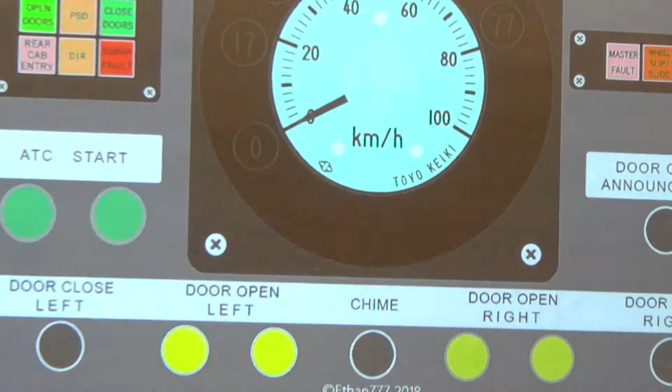Now you can continue, I will start the scenario. So now you are the train driver. What should you do first?

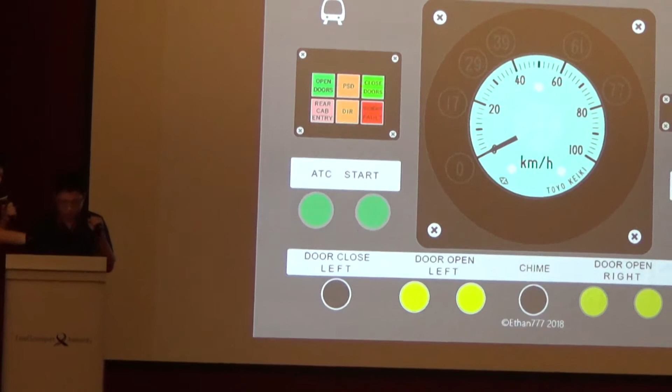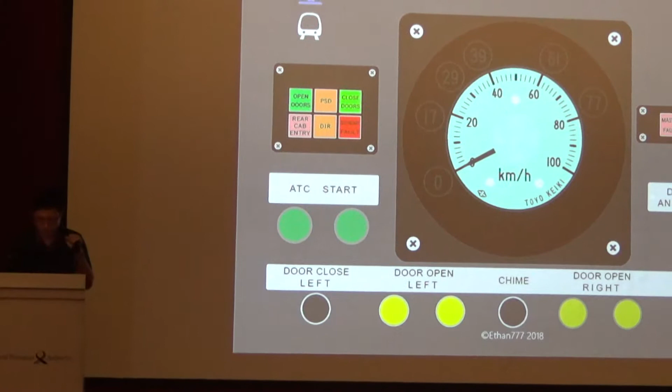Doors open, yeah, the doors are open now, right? So you follow all the indications. What's the first thing that you do? Door closed? No, before you close the door. Announcement. Doors are closing. Correct.

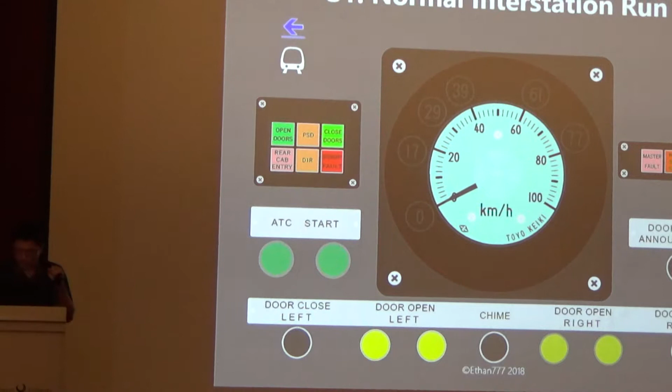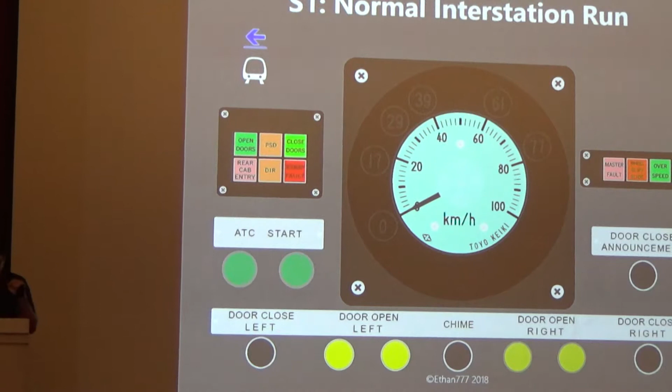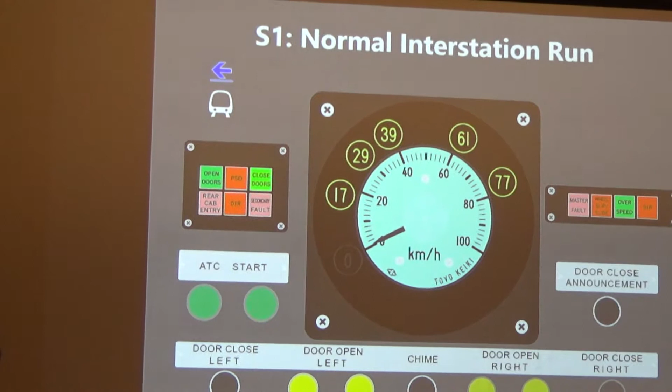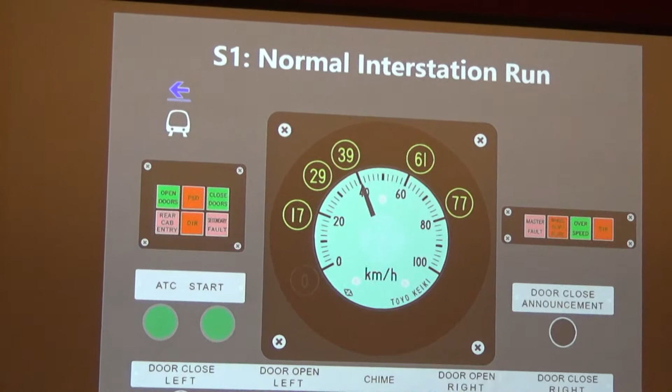So this is precisely my application. Like in reality, as of this point, you actually don't need to do anything because the train is driving on its own. So it is meant to emulate the signaling behavior on the North South East West line, Westinghouse. So the reason why I chose...

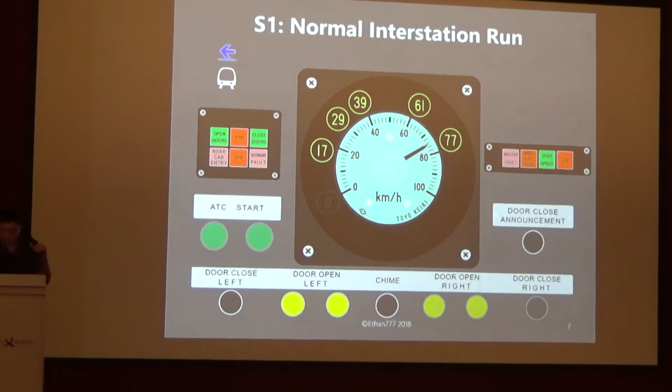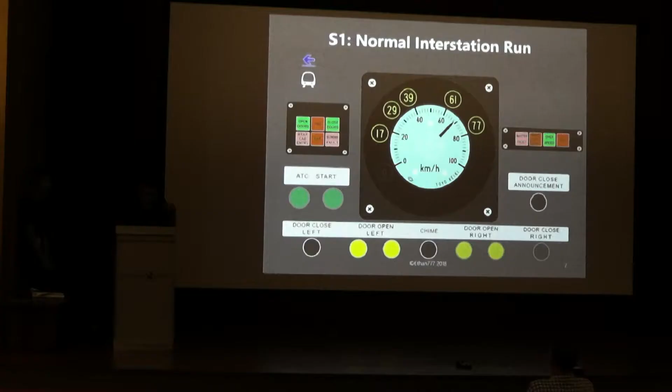And you can hear the sound. Change at this station for the Circle Line or North East Line. So we've got the doors open, yeah. Oh yes, that's now.

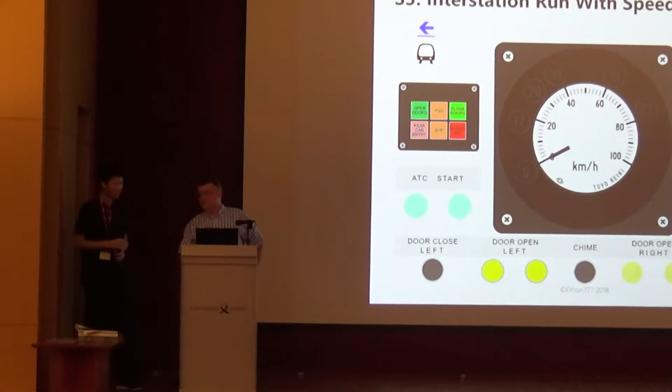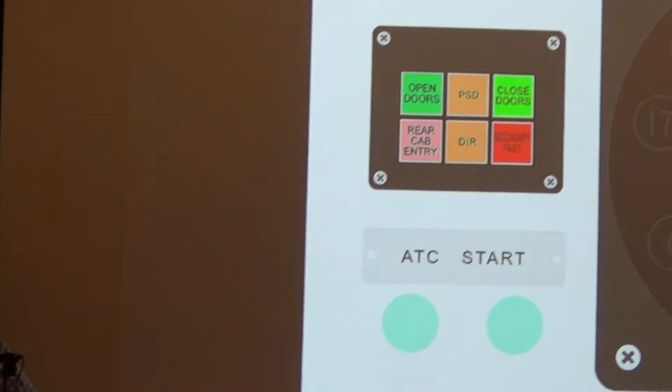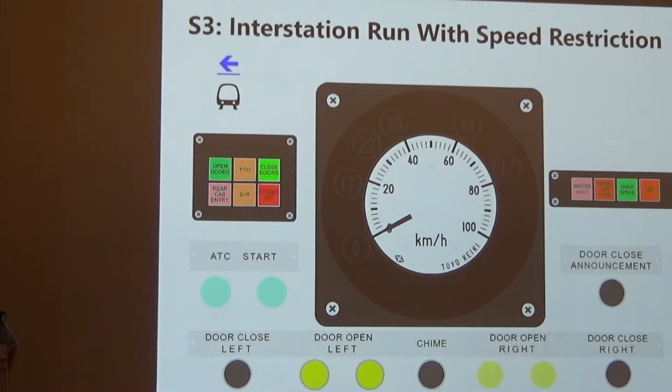Oh, this one, yeah, okay. Wrong one. Oh, this one here, is it? And it's on the right hand side. Oh right, yes, okay. And so you watch the indicator ports.

So it also teaches the user, the train captains, on the indicator dashboard. What does the PSD indicator mean, the DIR indicator mean? Alright, you start your train. ATC start. Yeah, ATC start. It's all about the nuances.

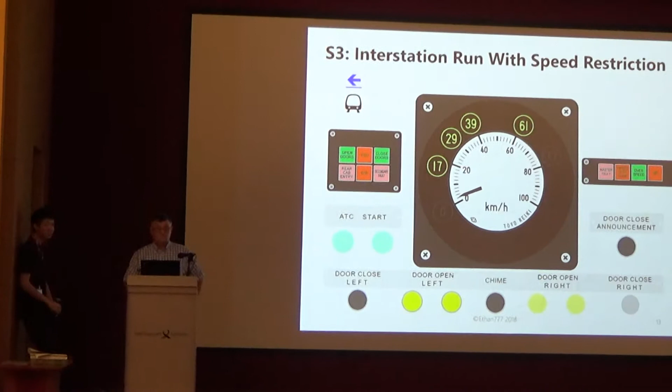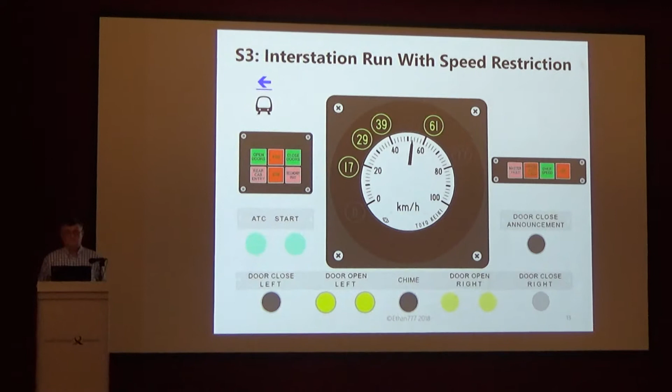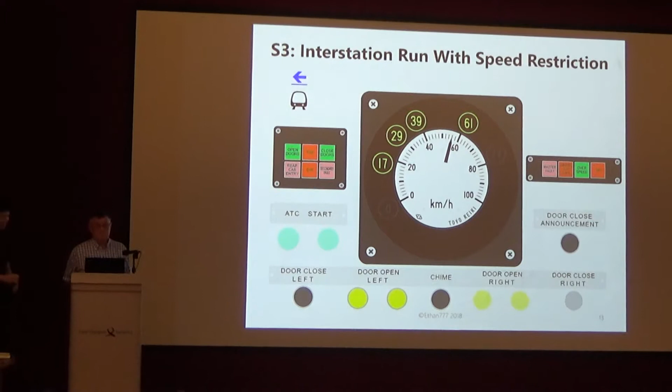Next station, Lakeside. Okay, so if you notice the code only goes to 61 because it's a crossover. Martin, this is the end result of your code selection circuitry. Well, good job, simple. There's a code. Just look carefully, yeah?

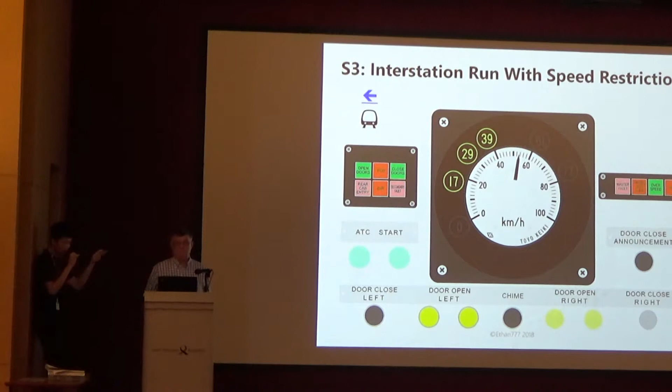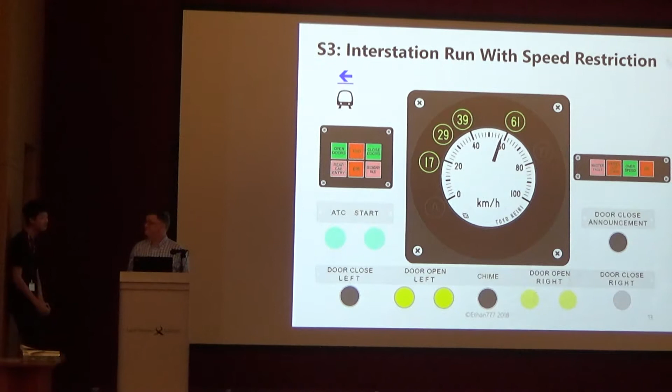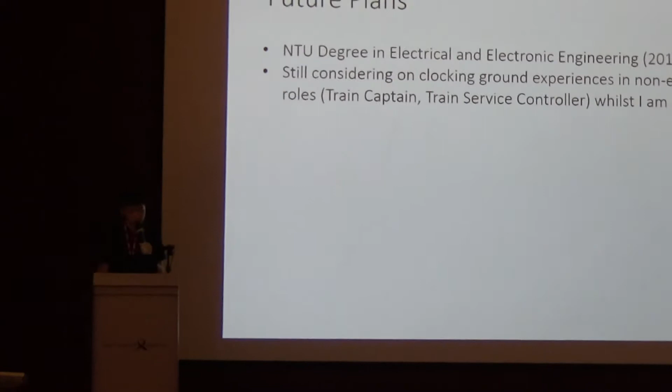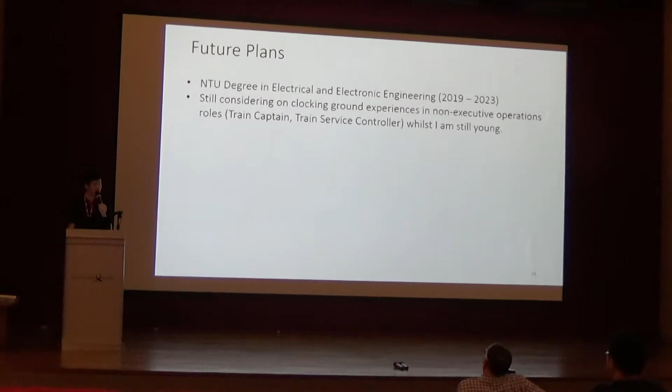In EEE, NTU, at the same time, I'm still considering whether I should clock all the non-executive roles on the ground, because I want to walk the ground before moving on to being an actual engineer. Because a part of me feels that I want to take a different track, given my passion. For now, I don't mind biting the bullet for shift work, and also given that I'm still young, so I'm physically able to do all this. I don't know whether when I'm older I may not have the capacity to.

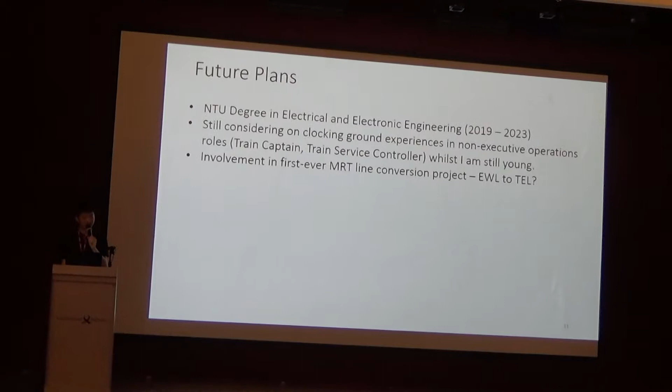So yeah, maybe by the time I graduate, I can be involved in the Thomson Line conversion project at Tanah Merah to transfer all the line over. But we'll see. So that's all I have for today. Thank you so much for coming. Any questions?

Okay, if I'll start a quick question off. Do you think there's a tendency in the railway industry with all this CBTC to go for what you might call a one-size-fits-all solution? It seems like in a lot of railways, 90-second headway is the holy grail. Do you think that is always necessary? And there might be a case for having like a toned-down CBTC system?

To me, in my opinion, I think we're just pushing the limits for extremity. So although there may never be a time where you can get the 90-second headway, I think what LTA wants to feel today is that they want to have the assurance that whatever system they go and design, all the signaling is capable of performing to such close headway, even though we may not get there. But I think you just want the assurance.

I would say it's just being ready and accountable. So at the start, because you won't know when travel demand might increase for that line, and suddenly, wow, so much demand. But at least if your signaling is designed for that 90-second headway, you have it at your disposal.